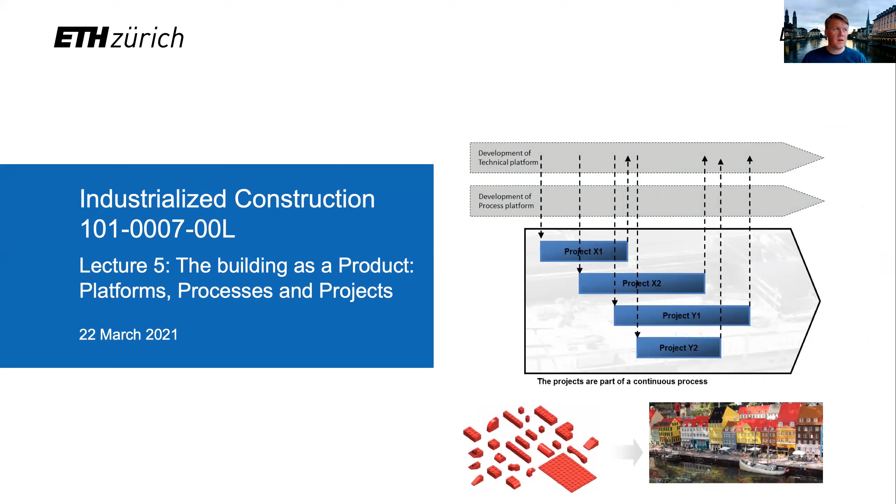Today we're going to be talking about the building as a product, and that involves platforms, processes, and projects. So a lot of the letter P, and we'll get into what that all means and the differences between these three things. And I think it's fundamental to show how industrialized construction differs from traditional construction.

As a short reminder, last class we introduced a framework for industrialized construction. You see here we have this wheel with these 8 areas and the 9th area that wraps around it. And in the second section, in our guest lecture, Dr. Jerker Lessing will present BoKlok as a case study, and he might also say something about this wheel. I'm not sure, but he is the one that developed it as part of his PhD research.

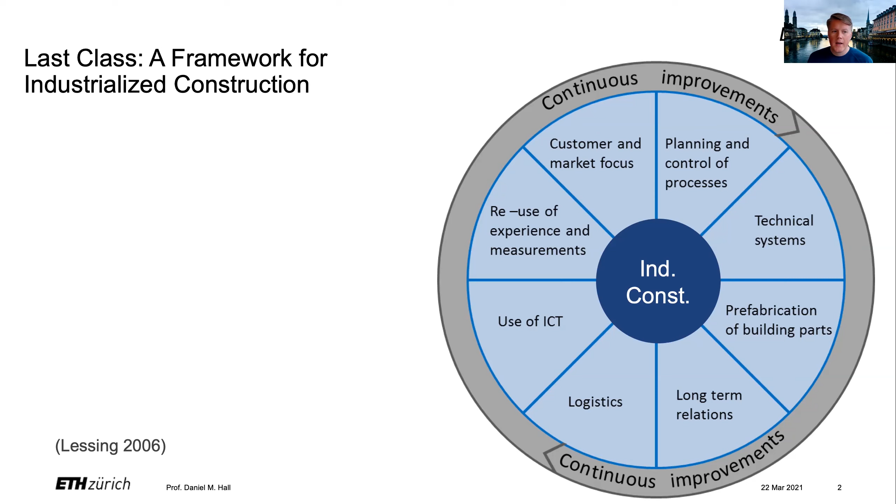And today's class, we are going to be talking specifically about 2 areas. So I would kind of say that this conversation is really around these 2 areas, which is the planning and the control of the processes and the development of the technical systems, and also on the connection points between these 2 areas. So if you think about the wheel, that's really what we're talking about today.

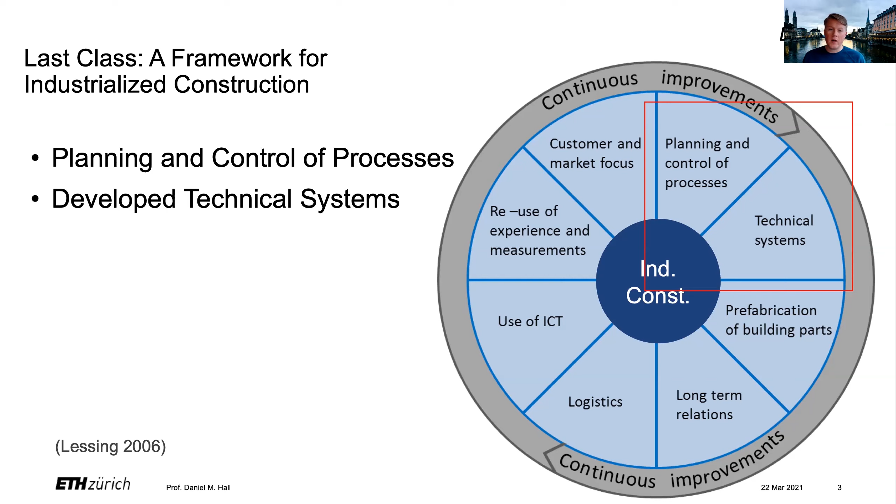So today I wanted to start with a discussion on the Jamboard. The question I'd like you to talk about is the phrase, the building as a product. So what does the building as a product mean to you?

And I also just want to take a moment to acknowledge just how far we've been in 1 year. So I actually wrote this slide exactly as it was 1 year ago, right in our very first breakout rooms with Zoom and Jamboard and a lot of these new technologies, which you've probably now become used to, but I had to give very specific instructions like how it was going to work and how closing the breakout rooms would work. And I just found that quite interesting 1 year later that now it's a normal part of our lives. So let's just take a moment to acknowledge everything we've been through in 1 year, and what an interesting time that we now are in. And so now I can just say, okay, go to Jamboard. Here's building as a product, and get started. So it's a far different world.

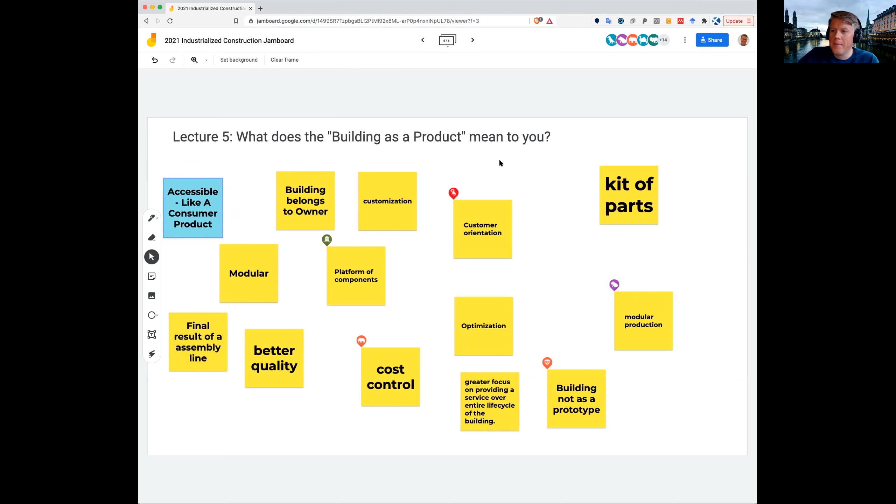This here, talking about building not as a prototype, right? We've talked about that a bit. So thinking about the building not just as a prototype, but as a continuous process. We'll talk a lot about that today. We hit on some other things like cost control. This is also important in product design, customization, yeah, lots of different ideas here. So I don't have time to talk about all of them, but this is a good warm-up.

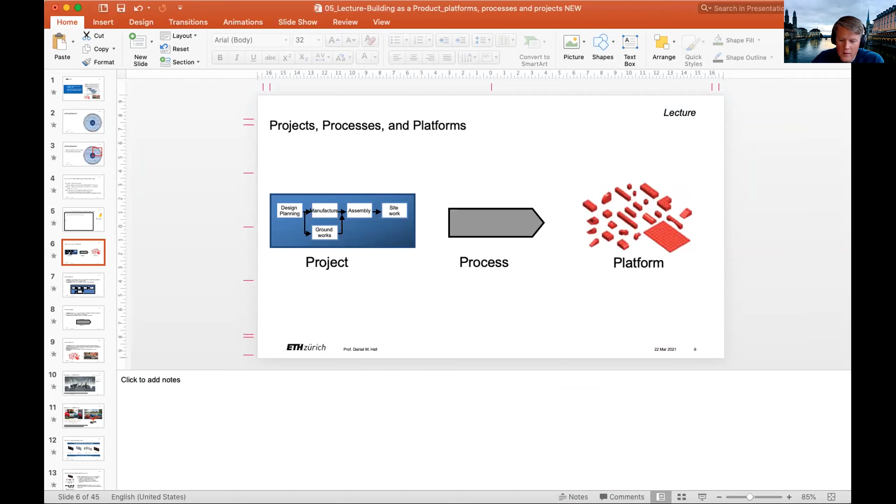And now let's talk about the differences between these P words that I've mentioned so far. So we're going to be talking today about projects, processes, and platforms. And I think it's key that we start first with a set of definitions so that we all know what we're talking about when I'm mentioning these things, right?

So let me just get my Zoom stuff out of the way here.

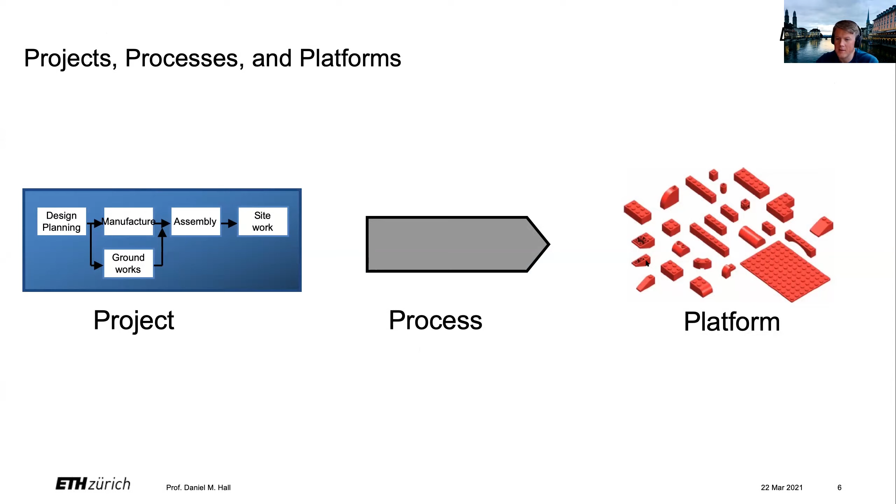Okay, so we've got a project. First, we're going to talk about project, then process, then platform. Okay, and platform looks the most fun. It's got Legos. Okay, so what is a project?

A project is a series of activities. It's defined with a starting point and an end point. And there's a certain amount of resources that are allocated to it. We are very familiar with projects in construction. Almost all of construction is made from projects. But a project is a very specific type of organizing, and it's found in the built environment quite a lot, but in other places, maybe not so much.

And a project exists only once and has its own unique prerequisites. It's very specific, and this is where we talk about not making a prototype every time. There are very specific contexts for a project. In buildings, it's the site, right? So there's a very specific construction site, and it has its own unique characteristics, could have its own building codes, could have all of its own unique parts.

This is not going to change. We still are going to need projects. So let's be clear about that. They're still a part of the discussion. And here is maybe how a project might look in an industrialized construction context, right? So you design and plan the building. Then you have some manufacturing activities that might happen offsite.

But at the same time, you might prepare the foundations, or groundworks, or whatever it is, the foundation work. And then when that's all ready, you come together for assembly of the product, of the different parts and components. And then you might have also some final site work. So put some nice landscaping up, or some painting, or something like this. So this is the idea of what an industrialized construction project might look like.

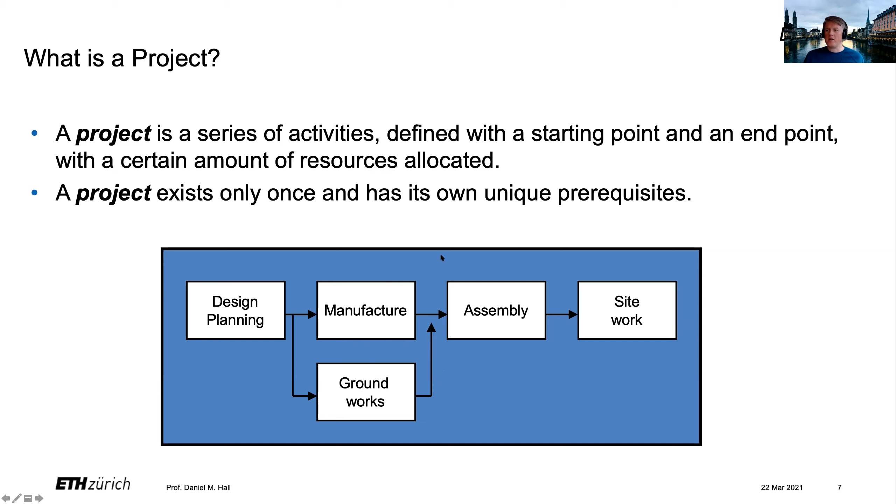Next, let's talk about what is a process. And again, I think it's an intuitive idea, but it's good to define it. So a process is a continuous flow of activities that uses information and resources to fulfill its role, to create value for the customers. Now, the important difference here is that a process is continuous. When you design a process, it's meant to be something that's reused over and over again, right? So for example, we have a process for how we enter the class. I give you a Zoom link and you click on the Zoom link. That's a process.

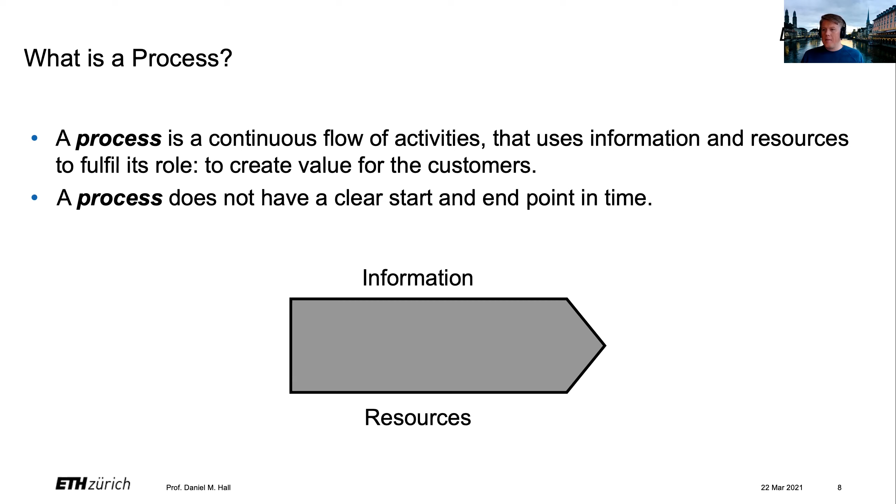And a process does not have a clear start and end point in time. So the whole goal of a process is that it just exists and can be used as it's needed. And so we're talking about information and resources. So the project has a start and an end date and very specific prerequisites. A process is continuous. It uses information and resources, and it has something to do with creating value. There's a goal of a process, but it's meant to be continuous and does not have a start and end date.

And third, we have to introduce the idea of a platform. So here is the technical definition of a platform. A platform is a set of common components, modules, or parts that form a common structure from which a stream of derivative products can be efficiently developed and produced. That's the very highly technical definition. I like the more playful definition, which is you can think about Legos and the design of Legos as an example of a product platform.

And I like to say that the Legos follow this single dot rule. So there's a standard spacing between these little bumps or dots on the Legos if you've played with them. And so we understand that this is the rules of the Lego platform. And then you can create new pieces within that technical framework that fit and follow the rules of the defined platform.

So if you want to build an arch piece here, you're not limited from developing new pieces. It's just that the arch needs to follow the same geometry rules and product rules as the other pieces. So you can innovate, but you have to follow the rules of the platform. And then from this platform, you can develop projects, right? So you can use them in many different combinations and develop these different projects here.

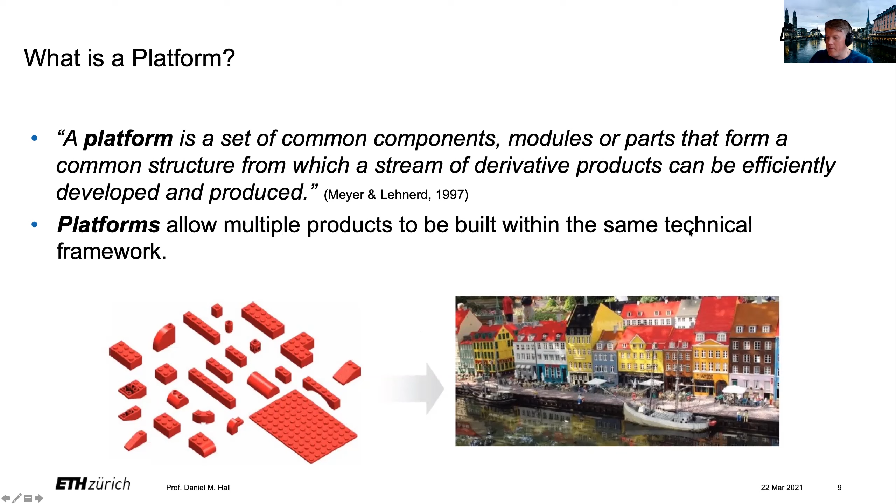And so platforms allow multiple projects or products, depending on the field, to be built within the same technical framework, right? And let me give you another example. This is the Volkswagen MQB platform, as they call it, the Modular Transverse Toolkit.

And the development cost for Volkswagen to develop this platform was 60 billion, I think US dollars, I think it was euro, I can't remember if it's US dollars or euros. It was 60 billion. That's how much they put into developing the platform, not into making specific cars, but into the development of the platform itself, right?

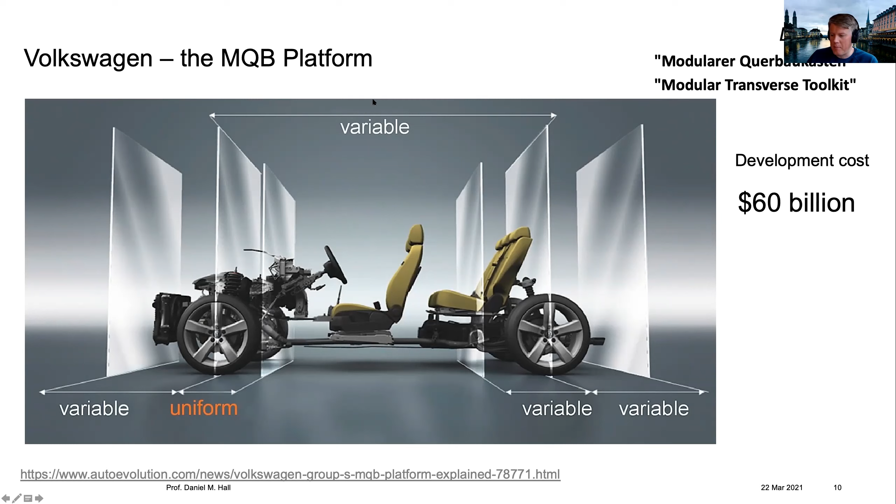And here's how they define the platform, right? So they specifically make a uniform spacing between the center line of the front axle of the car and this piece of the chassis. And this is uniform. This cannot change. But what can change is the spacing to the front of the car and the other spacing parts, right? So their definition of the MQB platform was to make things very specific in one part and then have other measurements where you could have some variability, right? So they put 60 billion US, or equivalent of $60 billion into this.

And from this platform, then they're able to create a stream of what we call derivative products, right? So you take this platform and you set this as constant. So you've put a lot of investment into making sure this works really well. And then you can have different concepts that come from this, right?

So here are all the different types of vehicles that are built upon the MQB platform here. So if you've ever been in any of these vehicles, either from Volkswagen or Audi or Skoda, these are all the different types of derivative products that can come from the same platform. And you know you have consistent measurements within the rules of the platform.

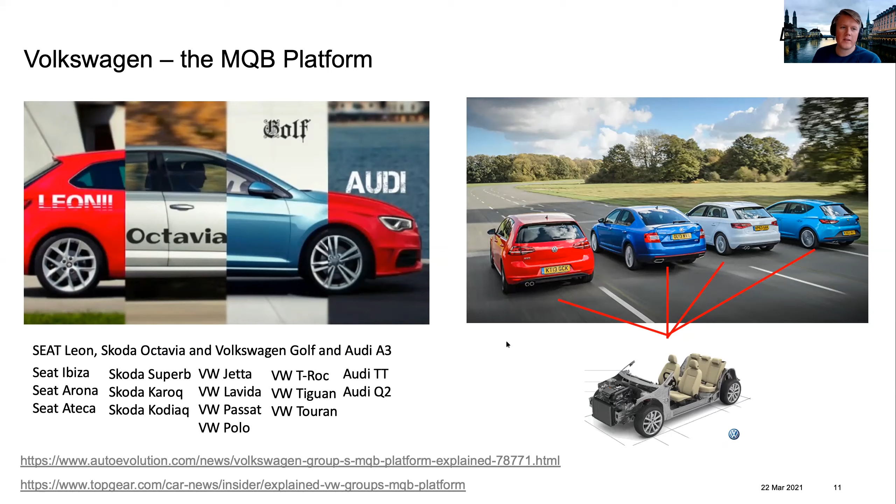Okay, so that works in the car industry. How does it look in the industrialized construction world? Here's what I like to say are our 4 stages of an industrialized construction project, which is similar to normal construction projects as well. So you have your design and your customer acquisition. We have some kind of engineering. In industrialized construction, we'll talk about configuration engineering. Then you have manufacturing and production. Maybe it's going to be offsite. And finally, if it is offsite, you have assembly and logistics.

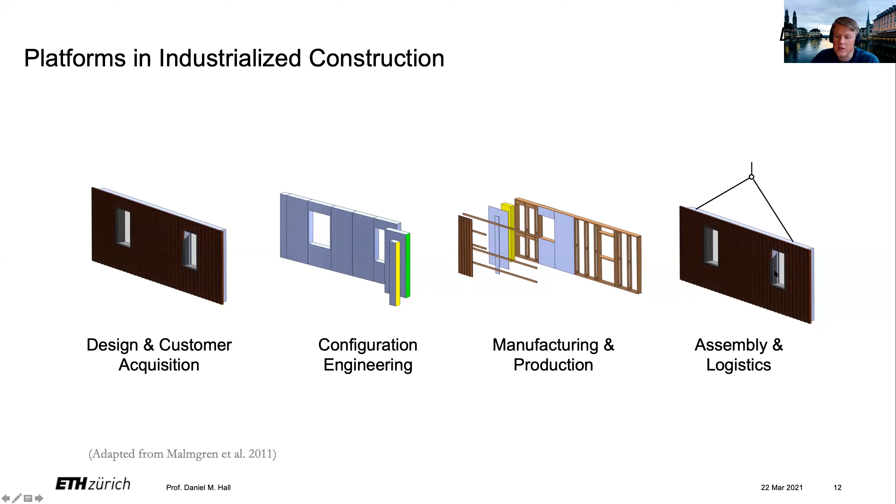And one thing that we're used to doing in construction is we take that information and we pass it along downstream, right? So this is the typical, I would say, BIM-based construction management process. A designer will start with a blank sheet of paper, but then they'll start adding things to a digital model, right? So they start adding the walls and the windows and starting to provide more information. And as the project moves along in time, you start adding more and more information until you get to the very end, and that's the final completed project.

Now, what a platform allows you to do is, in addition to just transferring the information downstream, you also have the opportunity to transfer rules and restraints upstream. What I mean by that is that if there are certain rules and requirements about the size of the modules that can be shipped, such as the type of transportation you're going to use, certain types of trucking or things like this, you can then start to put those rules into your product platform. If there are certain machines that your company has invested in that have limitations to what they can do, you start putting those earlier and earlier into the upstream design and customer acquisition.

In addition, if you configure the building with certain rules, then you can also transfer these upstream. So this is the idea that the platform approach not only lets you pass information downstream to the later parts of the supply chain and stakeholders, but it also enables you to pass information upstream so that you can make sure you don't design things outside the rules of the product platform as you see it.

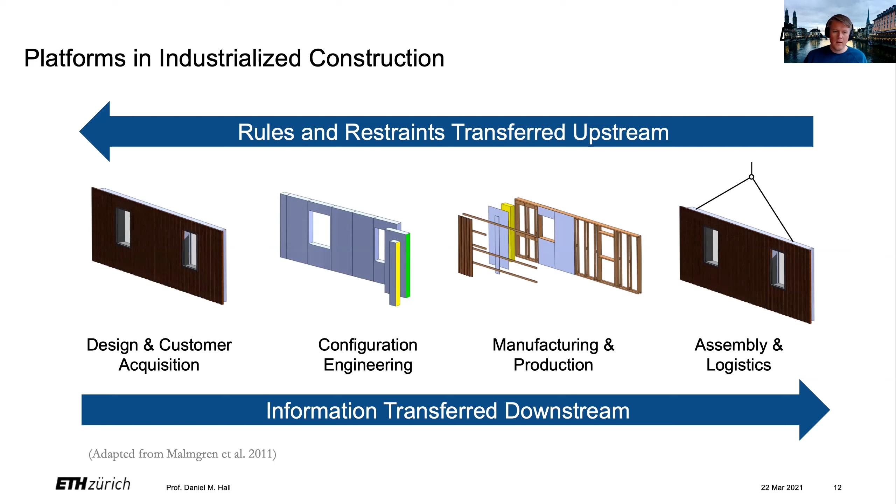Now, there are different types of platforms, and you've probably heard me use the phrase product platform. And I want to be clear that there are different ways of understanding platforms. So this is a definition that helps understand this a bit better. Overall, the product platform is kind of synonymous with what I would call the technical platform, right? So the technical platform is the set of subsystems and interfaces of the product family.

And so if you think about it, if you have a whole building and it's made up of some panelized walls and a certain roof system and trusses, that all together makes the product platform. And there are these subsystems that fit within this. So there's the modular and systematized architecture. There's the interfaces connecting the subsystems and the standards and design rules to which the modules conform. That all goes into the technical product platform.

Now, there's also the process platform, and the process platform is the setup of the production system, which is just as important. So it's how do you set up the production system so you can achieve the variety of products that you want. And if we're going to talk about mass customization or configuration of buildings, then we start talking about the idea that there's a need for a process platform so you can get the right level of variety that you want in your products. And I'm going to give a bit more of an example in a moment.

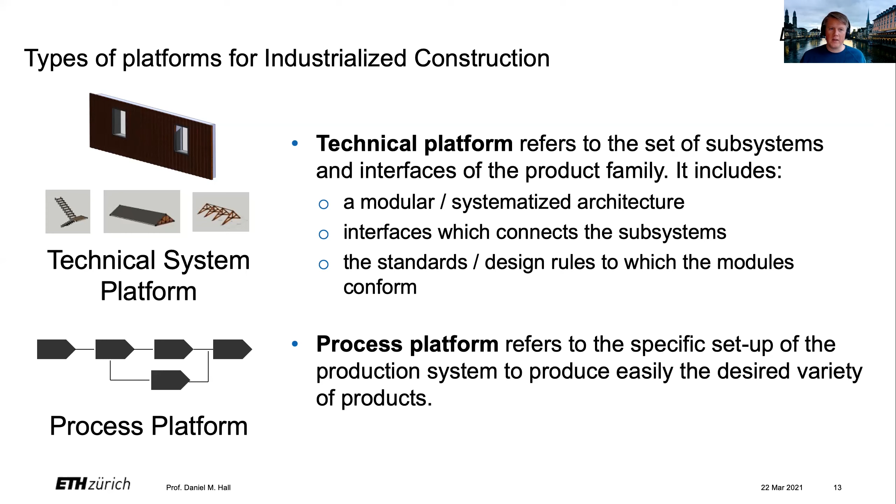And finally, there's this idea of a digital platform, or sometimes we call it a configurator. And we'll talk in 3 weeks about what is a digital platform or a customer acquisition or design tool. How does that work? How do we configure using such a digital platform in a very lightweight and easy way? But that's not for today's lecture. So that's coming up in the future, this digital platform idea.

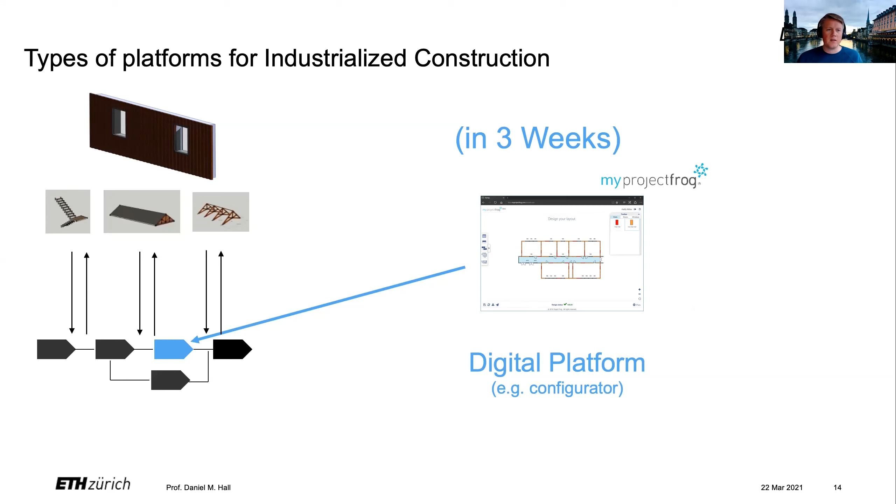So let me start first with the process for technical platform development. Okay, so here is the process that you need to follow in order to develop a technical product platform. And it's one that you'll also have to think about each of these 5 areas in your course project as well. So you have to develop technical solutions for the building parts, right? So each part and component, you have to think about what is our technical solution, of course. You have to develop a structure for the overall platform. So are there certain rules or structure to the way that the product works?

Like, will you design on a grid so that every 1 meter you can make a kind of a change, or will it be more flexible, less flexible? These are some of the structure questions. Will you develop common interfaces to make the components interchangeable? So this is key in Legos. If you think about the example of Legos, the common interface is these dots. So this spacing is the way that you make things interchangeable.

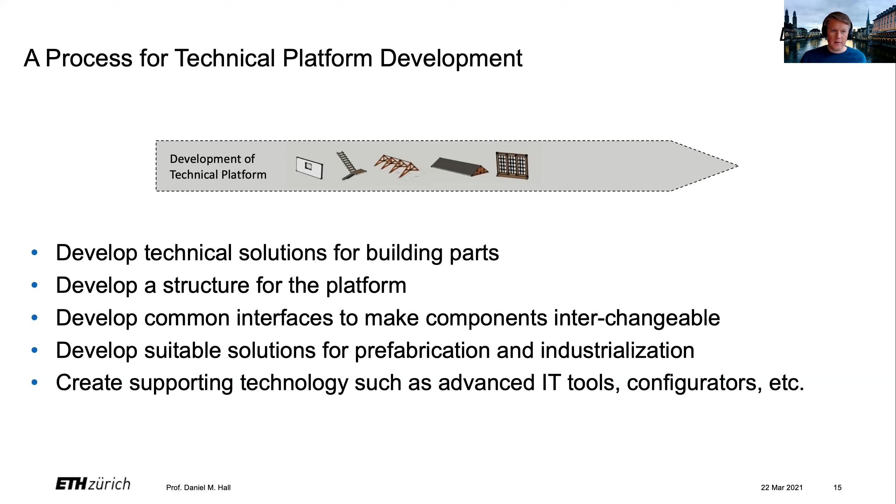Will you develop the suitable solutions for prefabrication industrialization? So does your technical platform match your fabrication capabilities? And are you creating the supporting technologies such as the advanced IT tools or configurators, which we'll talk about in a few weeks. So this is how you develop your technical platform.

You also have to develop a process platform. So this is something you should think about. You won't have to put as much work into it for the course project, but you do need to have some time thinking about your process platform. And you should be able to standardize process and methods and divide into modules. So this doesn't mean modules as in volumetric box modules. This means modular structure to processes. So one stage ends and a new stage begins.

And this involves developing of planning methods and structuring the production methods and sub-processes. So you can start to think about how does the entire step-by-step process of fabricating your building exist? Or what is the step-by-step process of designing your building or your facility? And it also includes structuring the methods for information sharing and support with adequate tools. So who gets access to what information? Who are the stakeholders involved? Methods for continuous improvement, of course, and supporting IT tools.

Now, we also need to think about what's the relationship between processes, products, or product platforms and projects. And that's what we'll talk about here. So if you think about it, it's going to be a continuous process. You don't want to develop your technical platform once and then never work on it again. The development of a technical platform is continuously improving, and Volkswagen is developing their next technical platform now as we speak, right? It's because they're not going to just be satisfied with one and say that will exist forever. So you try to improve from stage to stage, and then you want to also have an interface between the product platform and the process platform.

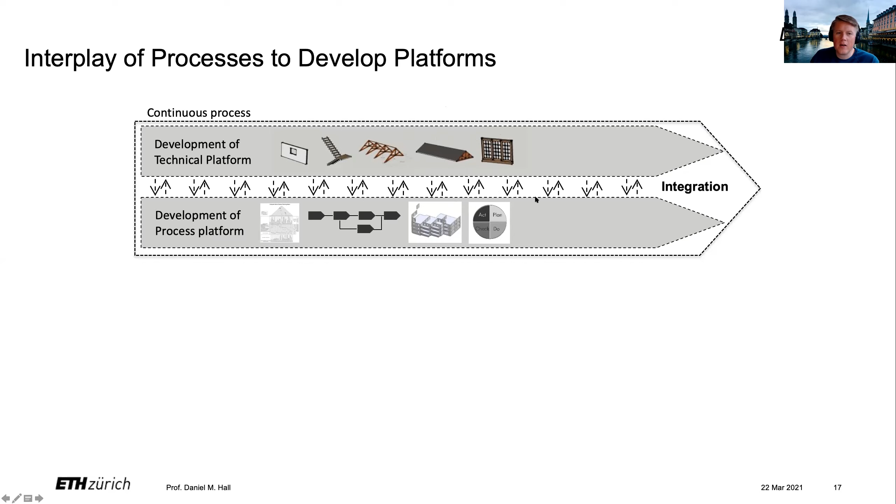Now, importantly to mention as well, customers don't buy platforms. You cannot sell your platform to an end customer. We are in the business of projects. So unique buildings are built using projects, but these projects now can be based on the solutions from the platform. So again, it's not about doing a prototype, it's about developing a clear platform approach, but then basing your projects on solutions from that platform.

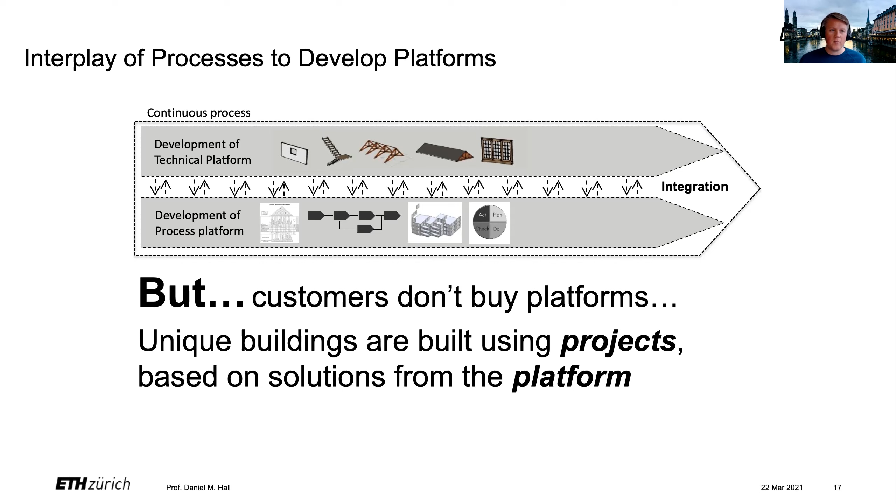And then that allows you to decide if you want to enter in certain levels of customization. You can design that into your product platform. So you might like to have a lot of customization, and you might only like to have a little bit. That's up for you to design with the product platform. And I like to think about it like this. We heard kit of parts was one of the post-it notes we saw at the beginning of class.

If you think about it this way, you have a product platform. So these are the rules, the technical specifications that you have to follow. Then when you're ready to develop a project, you create a specific kit. So a project kit that can be used, or we hear the term kit of parts. If you buy a set of Legos, this sheet used to be included on every set. I don't know if it still is. I think so, because my son, I think, had it on his recent set.

It tells you exactly every piece that's going to be put into that specific project that you're going to make. And this would be the equivalent to a bill of materials. It's a list of all of the different specific parts that are coming with that set. And then you can develop your projects using these kits, right? So the idea would be you have a platform, you design a project, and it uses your kit. It doesn't have to use every piece, right? But it does follow the rules of the product platform.

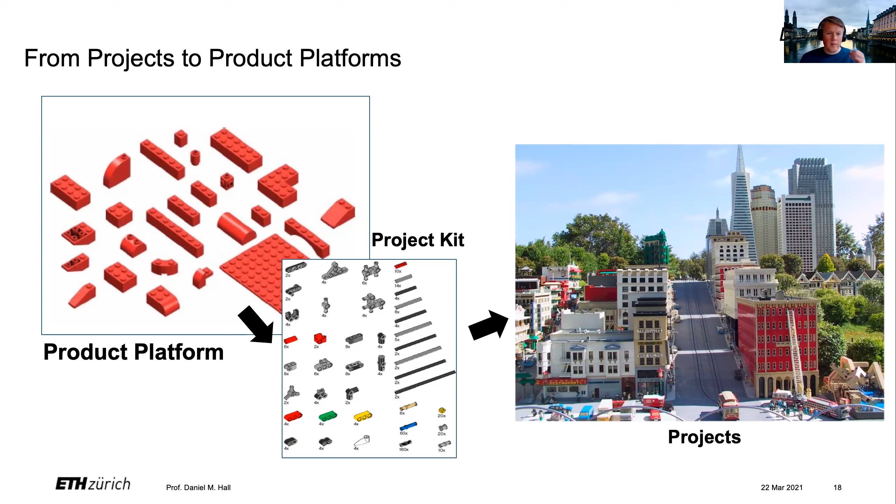Then you decide to ship. So you have your bill of materials, and you ship those parts to the construction site to be assembled. So that's the intersection between the product platform, the project kit, and the projects. And here's how it all kind of fits together. So here we have our technical platform, our process platform, and then here you see the idea of a specific building project.

So the idea is that you want to have your knowledge flow go from the technical platform to the projects. We don't want to start the project from scratch. We want to have put some investment into our product platform and then develop a project from that. But of course, we're going to learn a lot from implementing our first project. So then we want to have the opportunity that the knowledge flow goes back from the projects into the product platform. So the idea is that as you complete your first project, you start to have information going back and informing the next version of the platform, so that the platform is improved and the future projects are then improved.

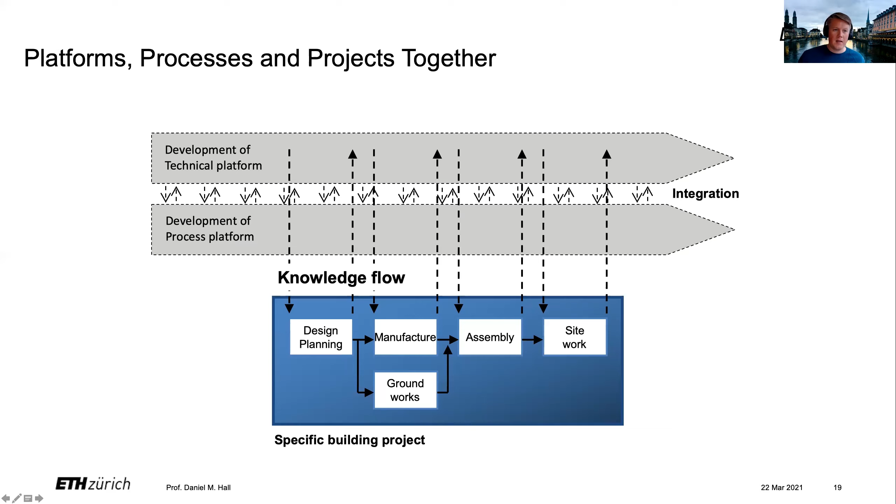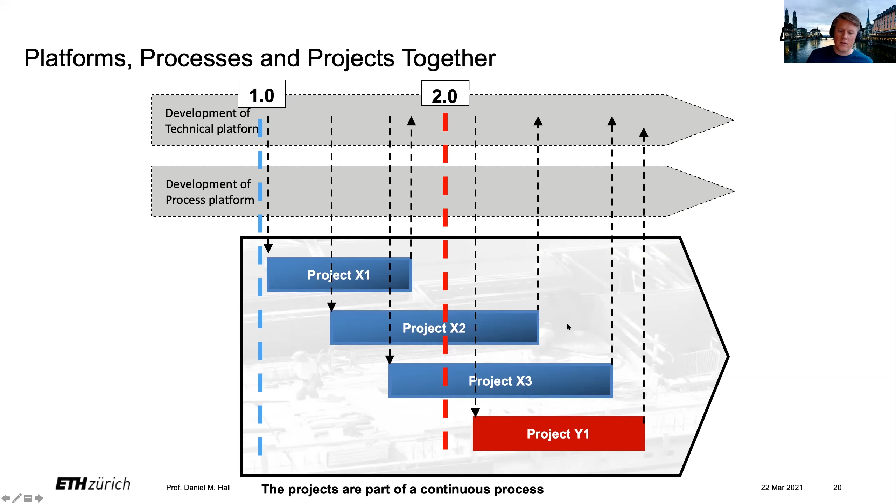We don't change them. We don't try to say, okay, now let's update all of our projects at once. They are already built with platform 1, let them be, and we're going to just focus now on version 2 moving forward, right? So now project Y1 is built with version 2.0 of the product platform. And meanwhile, you have these knowledges from X2, X3, and Y1 all flowing back into the platform. And then we can initiate version 3.0 of the product platform, right? So now version 3 will be even more improved.

And what I'm speaking about is not new to manufactured goods or software. This is actually quite a normal process of updating our products. But for construction, we very rarely capture this information, right?

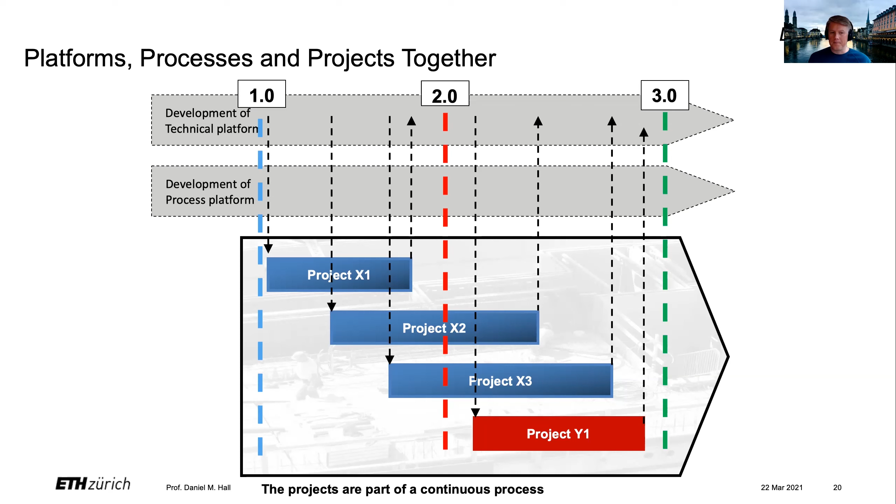So to summarize, the version 1 is that minimum viable product. We'll speak more about what is a minimum viable product later in the class, but it's basically your core, your first offering that just meets the minimum needs of your users.

And each later version is going to represent an improved product. So you start to put in more functionalities as you go further in design. But you don't try to design the entire platform at once, right? That will be too difficult to get everything right with the very first platform.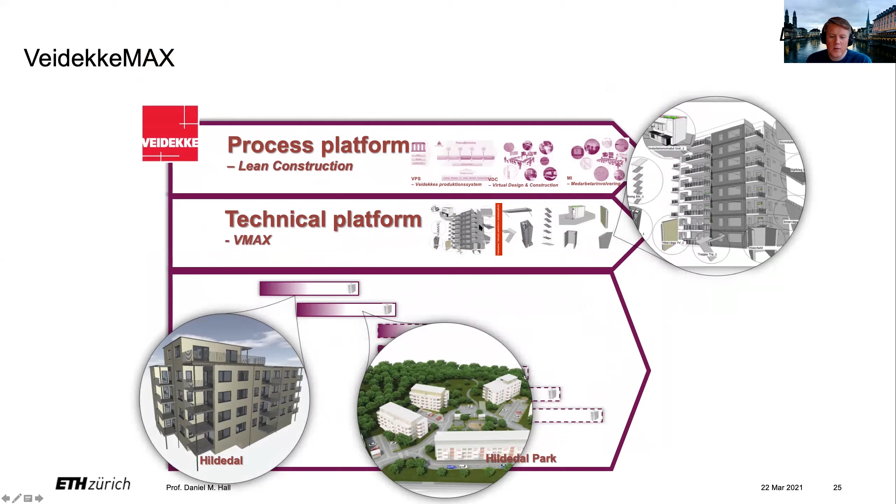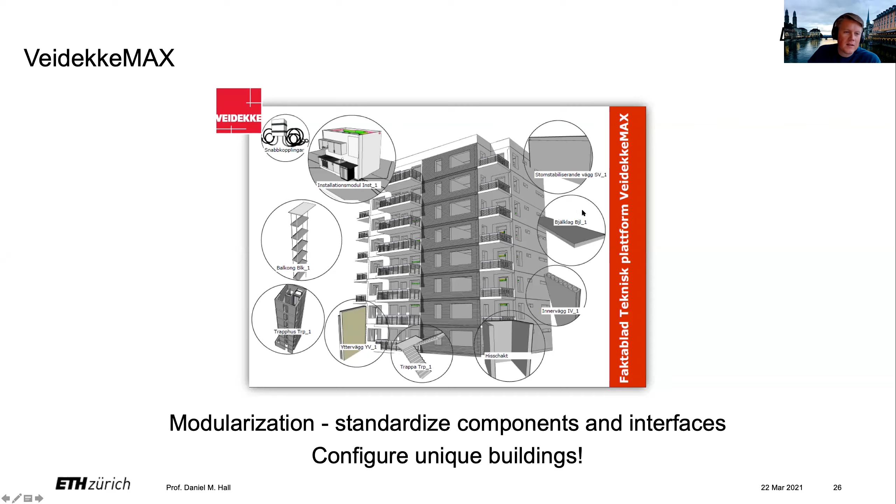So these were some details. We won't get into too many details. I just want to show that they had a modularized approach where they had standardized components and interfaces so they could configure their unique buildings. So, here you can see this is kind of like... I'll speak more about what this is in a moment, but they had some standardized staircases and concrete, again, showing industrialized construction can be done with prefabricated concrete as well.

And their idea was to standardize the building parts that don't add value to the end user or the client. So they were trying to only customize the things that add value and standardize everything else. So they wanted to standardize the apartment height, the walls, the columns, the staircases, etc., and then customize the design of some of the more customer-focused things like the rooms and things like that for the specific location.

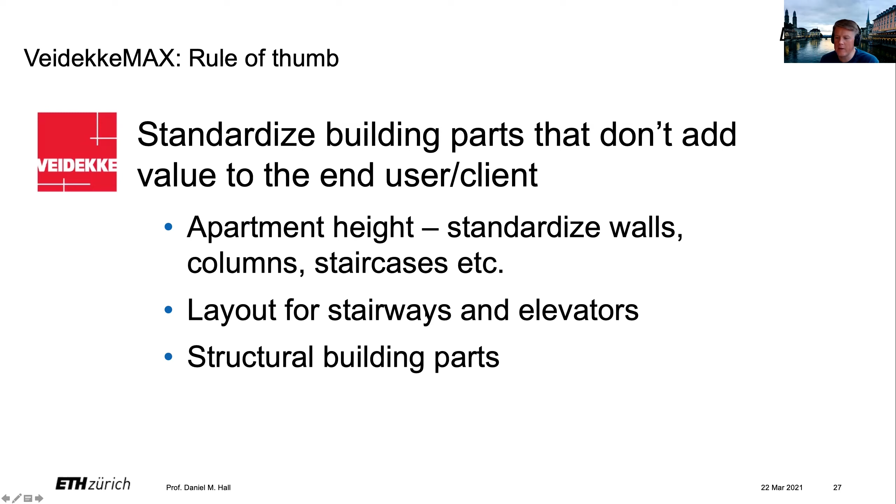So that was what they approached, and they developed a new product that they called the heart of the building system. So it's a kind of, I would call it a bathroom pod deluxe with a kitchen on the backside. So they have a lot of the services here, and then they have the kitchen on the other side of the wall, right? So you can kind of see here's a lot of the services, and then here's the kitchen. And they also had something that they called the spider, I think, or the octopus on top, which would run from the top, I'll show in a moment, to all the different rooms in the house, right?

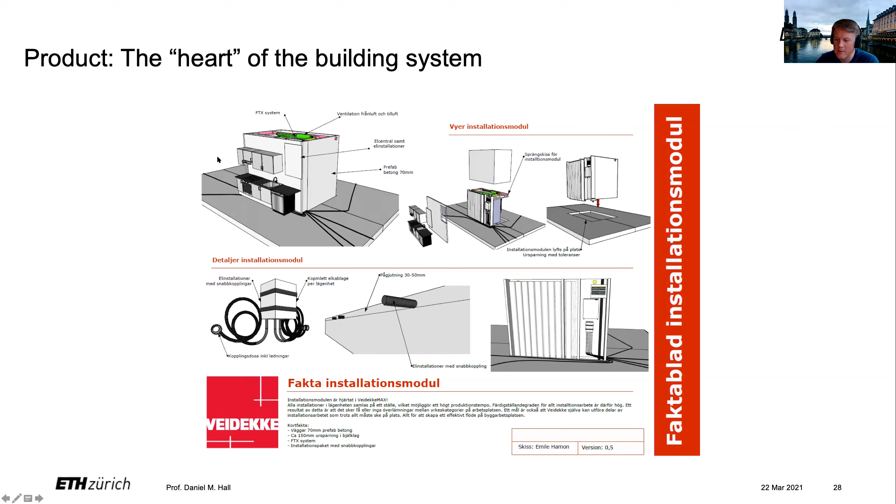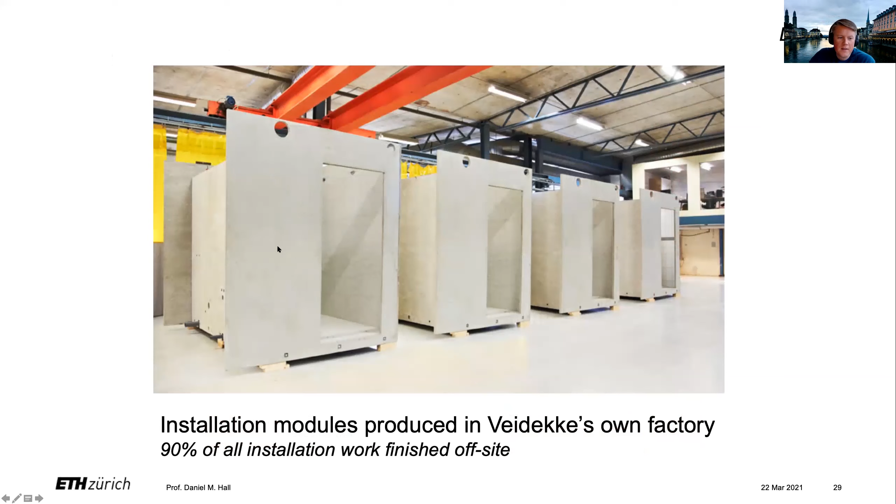So here's kind of what it looked like. So here's the modules that they built in their own factory. So 90% of all the installation work was finished offsite. Here's the prefabricated modules. And traditionally, they would have many trades that would build these systems, right? So they would have electrical, plumbing, mechanical, all these different trades would have to come through in very tight spaces.

And they found that these tasks were on their critical path. So these were the ones that were causing the most time in the building construction. So they wanted to focus on this. Sorry, I can't quite see. The new Max system, they tried to create this heart pod that had few or no handovers between trades to speed up the whole process and shorten the critical path activities.

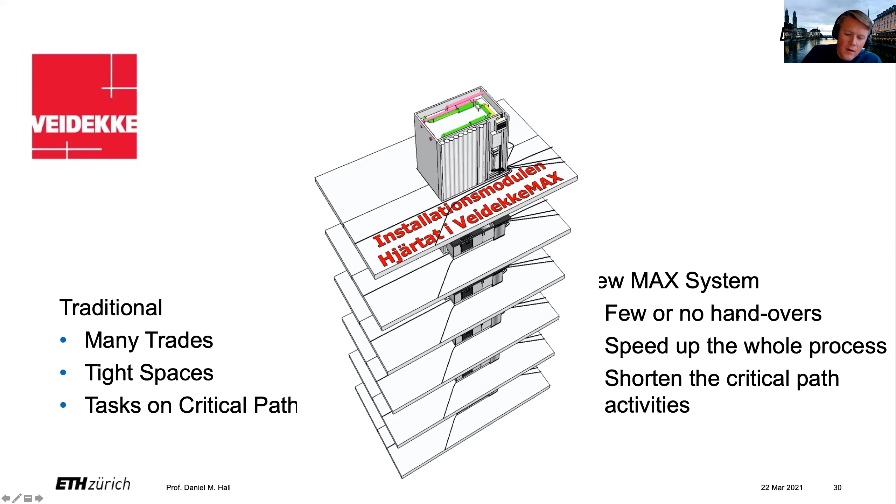So as part of the product, they had to find a quicker way to make connections in their electrical systems, because they were finding that the electrical systems were taking a long time to then connect from their heart to the different rooms, because that's where all the services were. So they created this thing called the octopus, right?

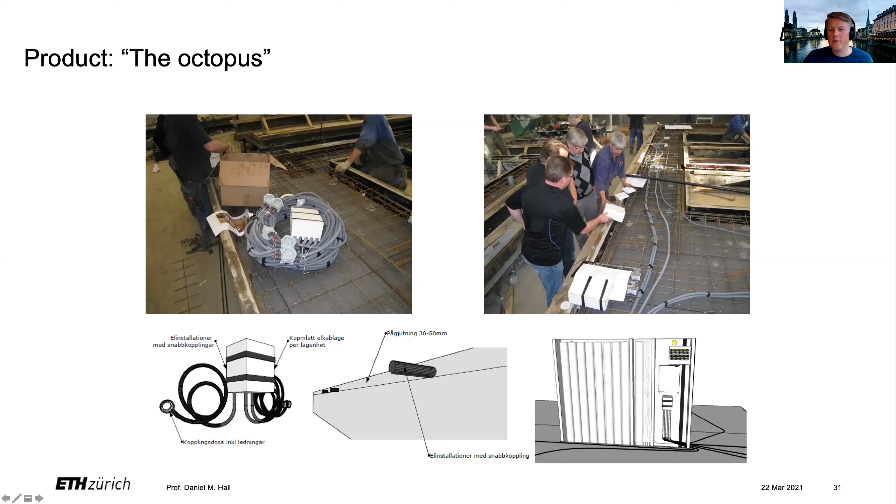So here's, again, my Swedish is not so good, but basically here is this main connection point, and it would run out like arms of an octopus and run through all the different, I believe it was the floor system, but it might have been the roofing system actually, to connect with the different electrical systems.

Here you can see what it would look like is you have your pod, and this box would sit on top, and you have all of these quick connect electrical fixtures that would run to the different outlets. You can see here are the different outlets on the plan drawing.

So again, it's this idea that you productize and create a product that fits your specific overall system design in a better way. So then they also designed their process platform, right? So it was not just about designing a new product, but also thinking about the process platform. And they went for a digital workflow.

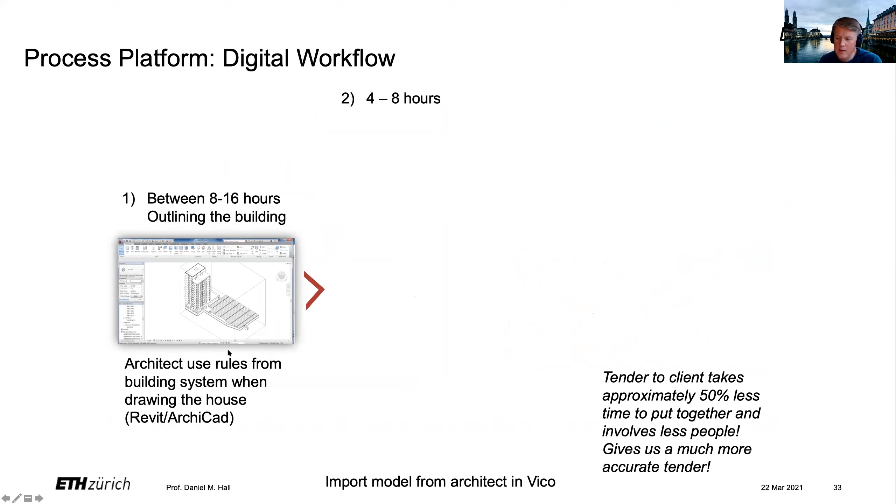So they spent 8 to 16 hours just outlining the building, 4 to 8 hours importing a model from the architect so that they could then customize it with their building system, and then finally come up with the bill of materials, the cost, the schedule, and LOB, which stands for line of balance, a scheduling technique. I don't have time to talk about that right now. And overall, they found that the tender process to the client took about 50% less time and involved fewer people. And it gave them a much more accurate tender approach.

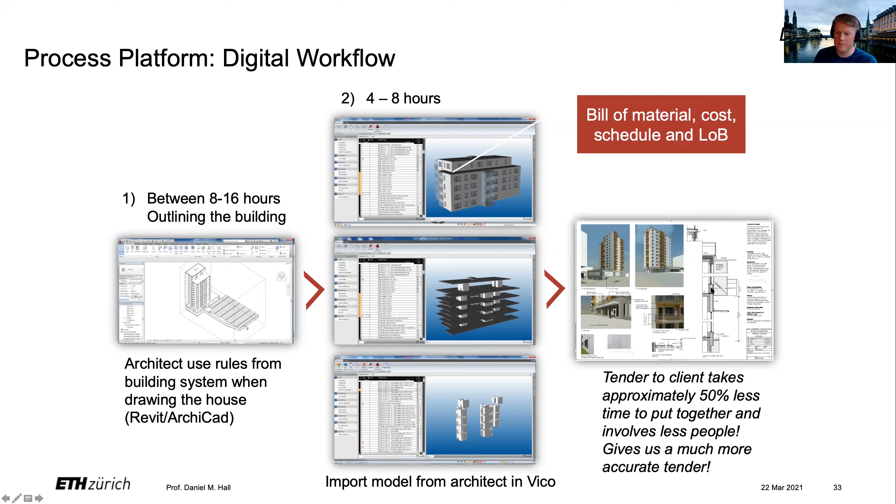They also developed their on-site instructions. We've talked about this before, but this is part of the process platform. So how do people install their systems in a way that makes sense? Because not everyone can read the detailed plans we're used to making in construction. So these were examples of how to install some of the stair systems. So they're saying, here's a risk moment, be careful, think very carefully about this stage, because this is going to be a dangerous step.

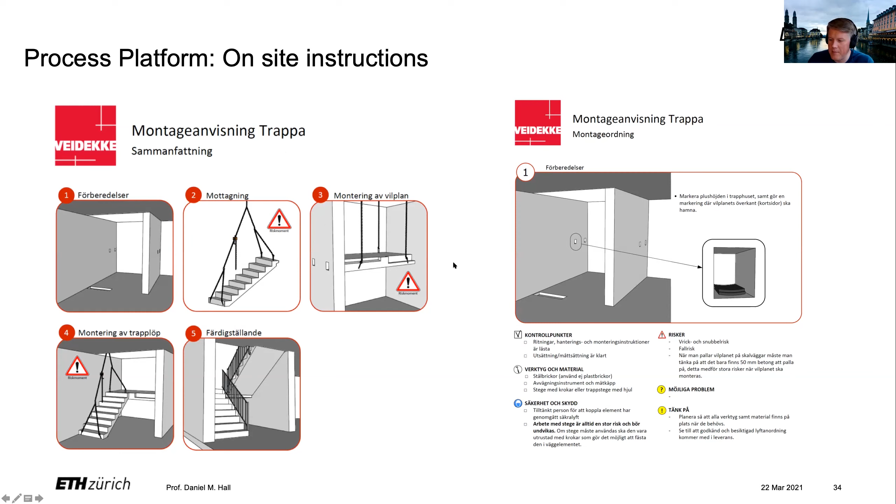And finally, in their process platform, they developed specified tool trolleys for the specific activity. So the idea would be you want a tool trolley that has all the materials, tools, and equipment you need and nothing that you don't need, right? So again, it's about less waste, the idea that you don't need extra things that create more confusion for the workers. But if you have a specified product, you can then provide specified tools for them to install on site. So here is an example of also thinking about the worker as a part of the process platform.

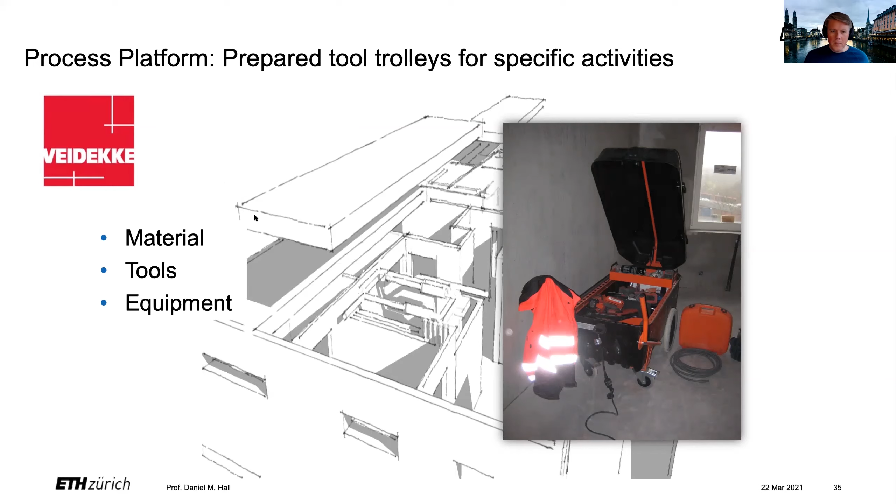Okay, so I can summarize here about platforms, processes, and projects, and then I think we have 5 minutes for questions. So you want to separate the development processes from the building projects. Again, the development of the platform, as we saw with Volkswagen, is a separate thing from the actual project itself, the actual building of the car, or the construction of the building. You establish the information flow in both directions, from the platforms to the projects, and then back from the projects to the platform. And you need to find a fit within your company's organization for how this will work.

And this introduces new roles in construction. You need to have a lead product designer, or a product platform manager, or a process improvement manager, right? These are not traditional roles found in architecture, engineering, and construction. It also introduces new tasks, such as configuration and design of configuration platforms, product system development, and someone that focuses on the continuous improvements.

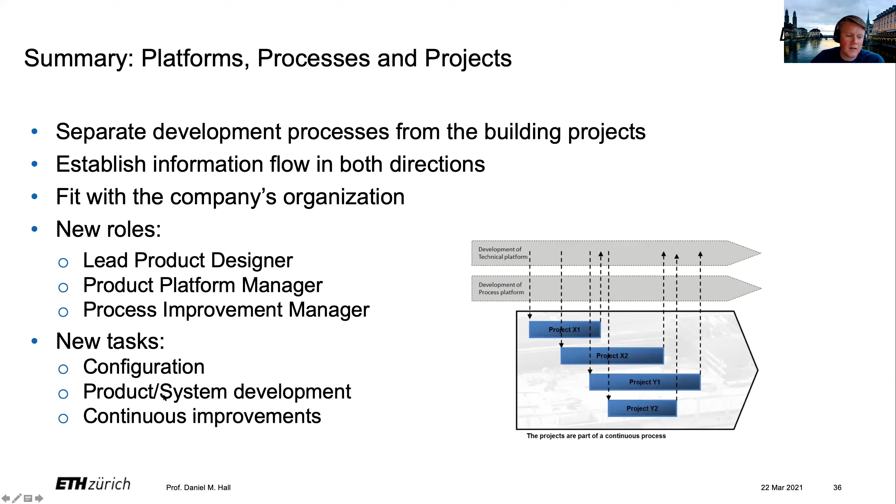If I would summarize the difference between project design that we traditionally use versus platform development, project design looks at unique solutions in building. It starts from very low levels of common knowledge, because you start with every building as a prototype. Your input from production is quite rare. It's hard to get that information from production if you don't know what your specific product is going to be. You have many options, so it's hard to get that input. There are limited levels of detail. The project is always a prototype, and it's very hard to continuously improve because you've not invested in common processes. So you have no reason to keep those processes for the next project.

By contrast, in platform development continuity is really the foundation. It's about a continuous approach. The solutions are based on repetitive use because you improve them over time. A platform development team gets formed, and it has multiple competencies, from structural engineering, house technique, architecture. They all contribute to the platform development. There's a high level of detail, but you must spread the cost of platform development across your many projects. So the business model for a platform requires investment in the platform itself, but then you have to make that back in your projects. And your solutions can be tested before implementation, because if you invest in a product platform, you should test that these actually work before you deploy them on projects.